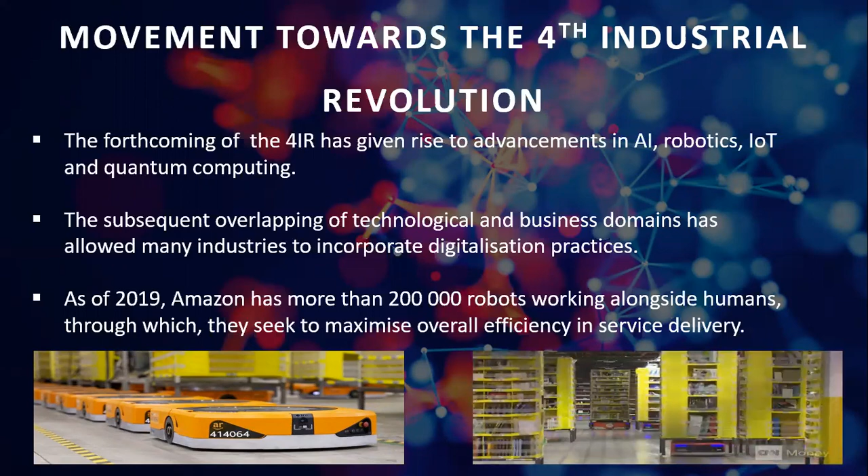Large companies such as Amazon have seen great success in the incorporation of artificial intelligence and robotics. The most fascinating aspect is that Amazon has more than 200,000 mobile robots working within its warehouse alongside human workers. The motivation behind the inclusion of robotics sought to meet the company's goal of providing speedy deliveries to their ever-growing Amazon Prime customers.

With its inherent complexity, construction is regarded as one of the most dangerous industries greatly susceptible to various unpredictable factors. By identifying, evaluating, and reacting to potential risks in dynamic and hazardous construction environments at an early stage, it is expected to eliminate safety hazards and achieve a sustainable reduction in fatalities in the industry.

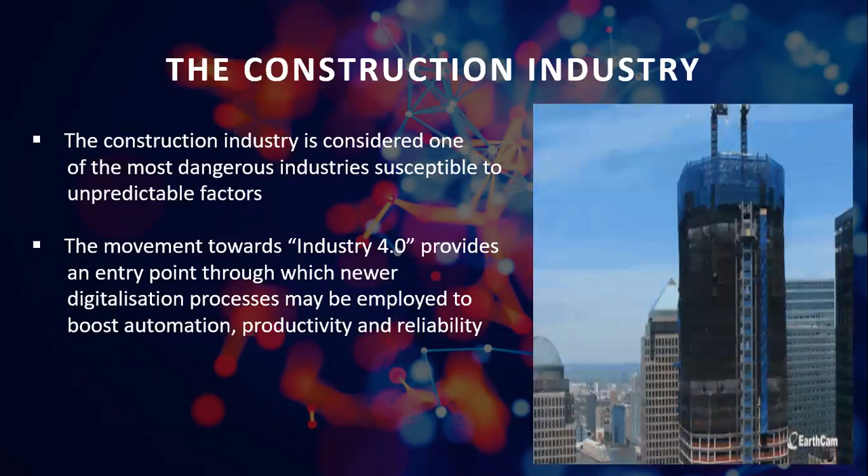Furthermore, as we move towards Industry 4.0, constant innovations towards digitalization can be used to realize considerable boosts in automation, productivity, and reliability.

Regarding the construction industry, widespread technological practices may be adopted to improve sustainability and efficiency. In particular, the industry may see advantages such as better creativity, design flexibility, reduced material waste, minimal carbon footprint, and more robust structures through the capabilities of newer technologies.

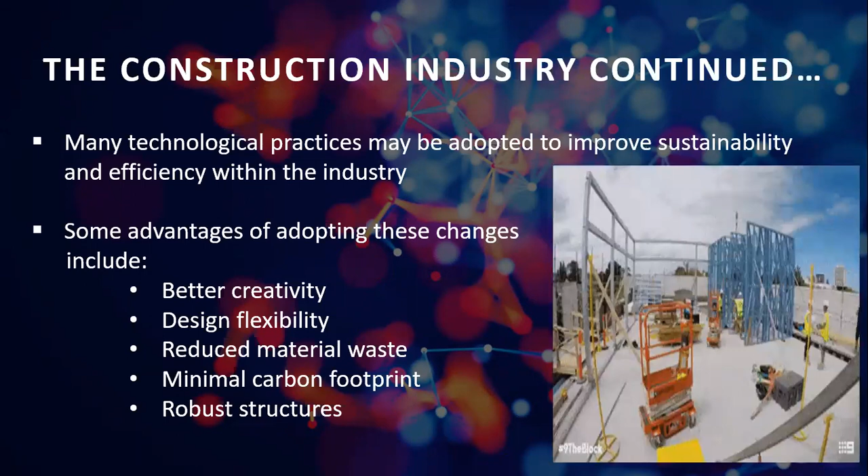However, the construction industry has traditionally been conservative in adopting new technologies and tends to divert from contemporary practices for selected projects only. Herein lies a gap that the inclusion of robotics such as 3D printers seek to fill.

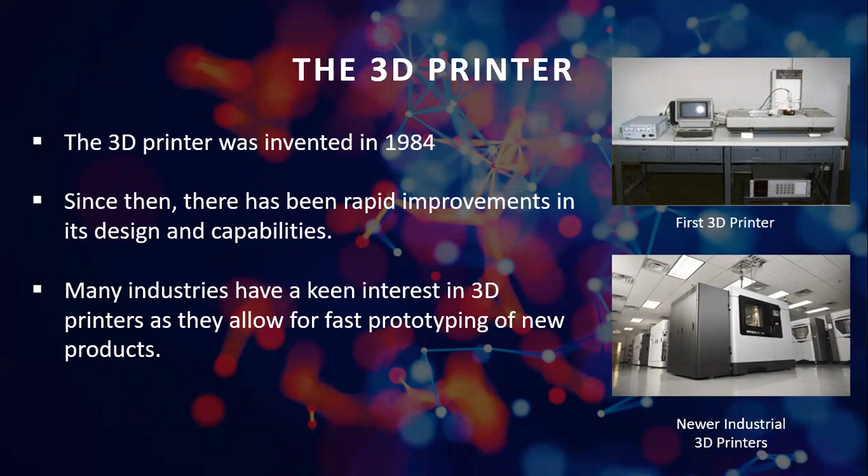The first 3D printer was created in 1984 and has since seen rapid improvements in its design and capabilities. In particular, various industries have shown interest in these machines as they allow for fast prototyping of new products. Due to the previously mentioned reason, there has been an increasing interest tied to printing materials and 3D technology improvements.

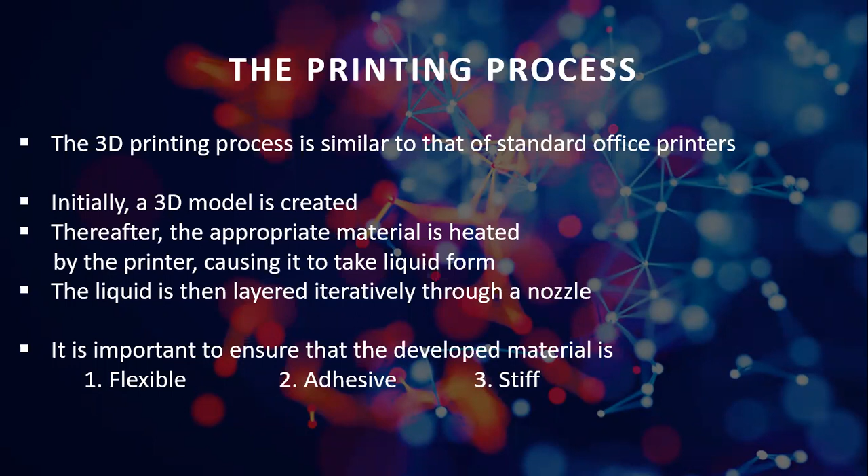The printing process is somewhat similar to that of standard office printers. The initial step to 3D printing starts on a computer where a 3D model is created and converted to an acceptable format. Thereafter, thermoplastic material such as biodegradable plastic is heated by the printer until it reaches a liquid state. The liquid is then laid iteratively by the nozzle of the printer in order to create multiple layers.

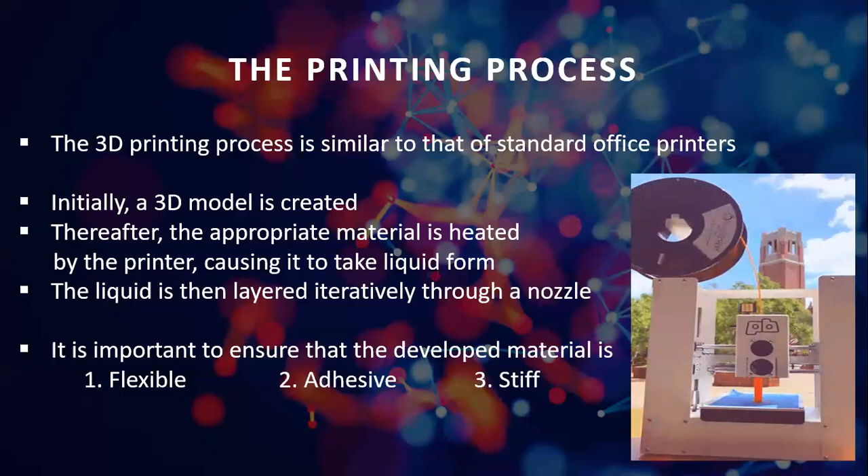Consequently, this leads to considerably less scrap waste, approximately between 70 and 90%, as compared to some traditional manufacturing methods. The most important task in 3D printing is to develop a material that will be flexible enough to create multiple layers, adhesive enough to join subsequent layers to the previous one, and stiff enough so the component can preserve its shape.

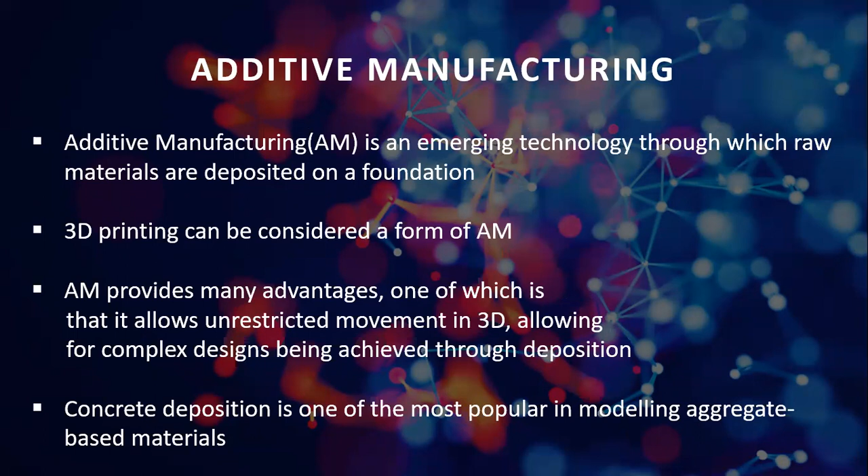3D printing can be considered as a form of additive manufacturing, which is an emerging technology through which raw materials are deposited on a foundation in layers via a nozzle which is attached to a robotic arm. The advantage of such a design will allow for unrestricted movement in 3D, which will further allow the deposition to form complex designs.

Regarding additive manufacturing processes, concrete deposition is one of the most popular approaches in modeling aggregate-based materials. The printing process is identical to the one mentioned earlier. However, the concrete mixture must be designed compatible with the printing machine. The resultant mixture is deposited in layers through the robotic features, which results in a more efficient process.

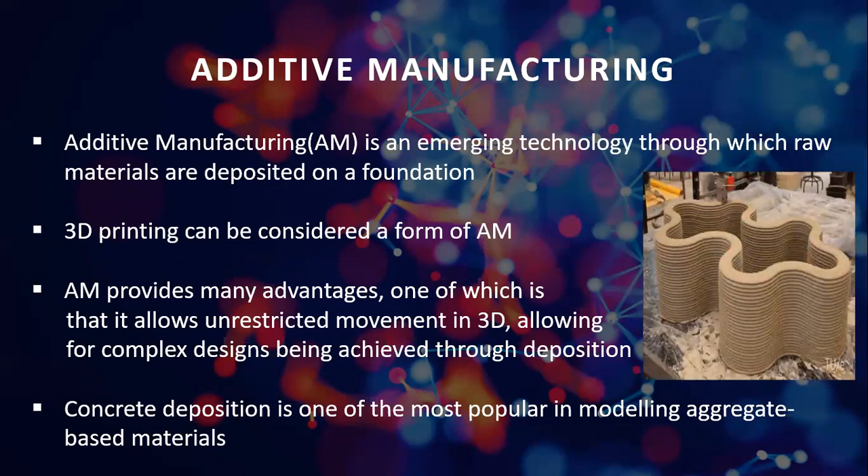Regarding the performance of 3D printed concrete samples, the consensus is that 3D printed concrete has a similar compressive strength to conventional concrete. Furthermore, other factors such as the loading pattern may affect the compressive strength of the 3D concrete. In particular, loading in layered and loading in perpendicular alignments may play a role. Printed samples are usually layered, thus bonding factors are hugely important.

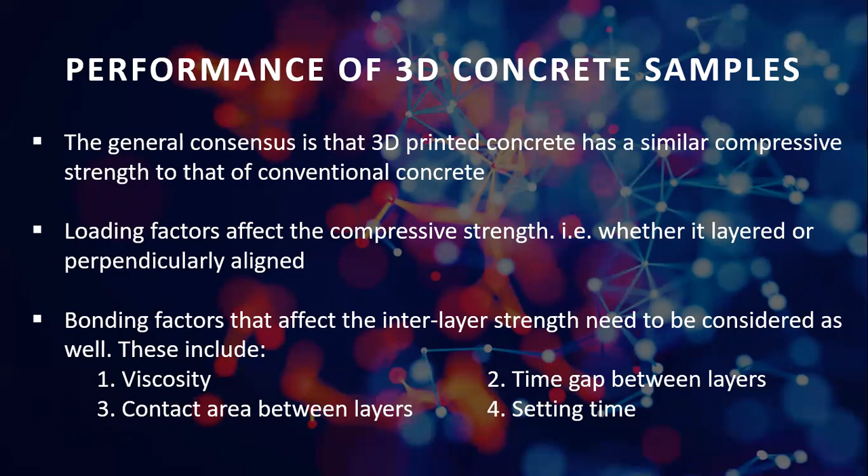Various factors affecting the strength of interlayer bonds include viscosity, the printing time gap between the layers, the contact area between the layers, and the setting time.

A revolution in the construction industry started in 2014 when the first printed house, known as the Canal House of Amsterdam, was created. A Dutch company designed the Canal House in Amsterdam, in which they sought to leverage the benefits of 3D printing to develop parts of the house on site. This project aimed to identify the feasibility of 3D printing in the built environment. Furthermore, they sought to eliminate building waste and minimize transportation costs.

The variations in 3D printing used in construction include contour crafting, concrete printing, and D-Shape techniques. The realization in each technique to suit specific tasks provides a basis for the future experiments to be conducted and evaluated. 3D printing in the construction industry is relatively young and presents a lot of limitations. However, there are high hopes for the use of 3D printed buildings and building components.

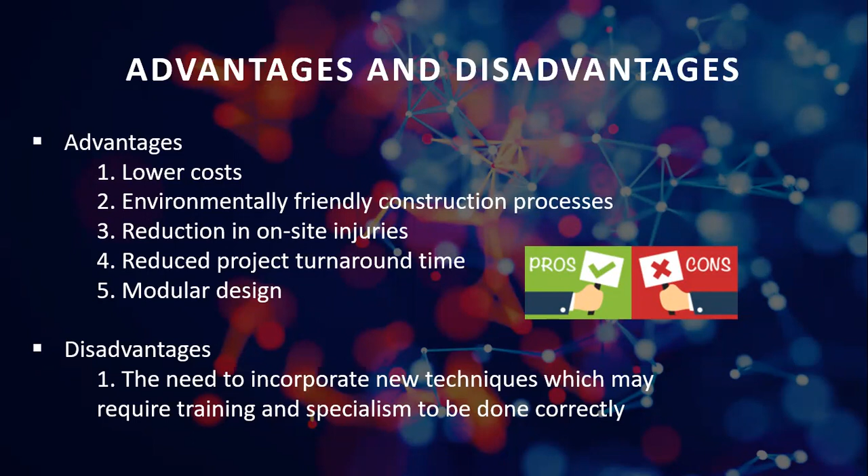With construction costs and clients' demands forever rising, the use of digitalization in construction through robotics and 3D printing is very much needed. It lowers the overall cost of a project by using more environmentally friendly materials. The time duration is also decreased because the method used reduces labor needs while increasing productivity. The digitalization of construction would have far less negative impact on the environment than traditional construction methods by lowering wastage by means of using materials that are fully recyclable.